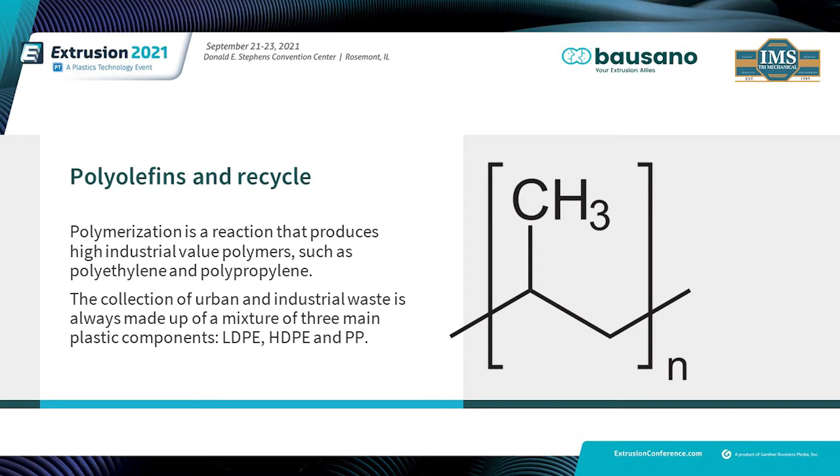PVC is one of the most used thermoplastics with respect to worldwide consumption. At a global level, PVC is consumed at about 35 million tons per year, and is only second to polyethylene as a volume leader in the plastics industry.

Currently, PVC can be processed into a wide variety of short life products. In other words, PVC packaging used in foods, cleansing materials, textiles, bottles, as well as medical devices.

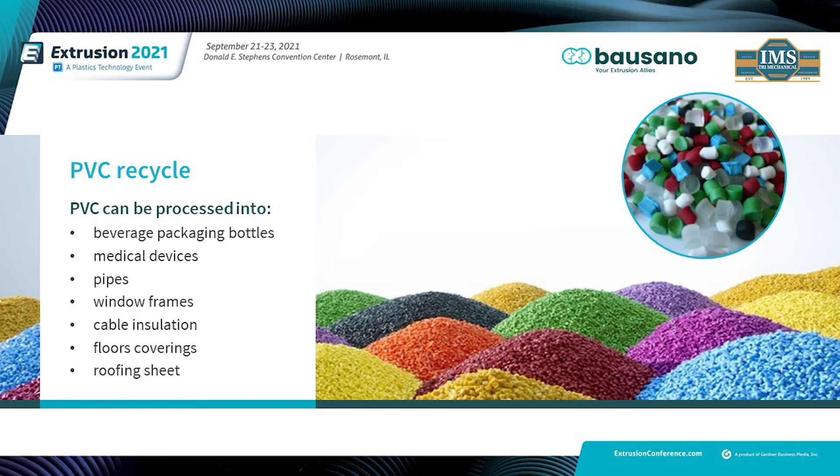Also, PVC can be processed into long life products such as pipe, window frames, cable insulation, floor coverings, and roofing sheet. We know that both pre-consumer and post-consumer scrap can be recovered and transformed into new products.

In mechanical recycling, the materials are ground up, remelted, and reprocessed. The high pressure, high temperature, and stresses undergone during those steps lead to changes in the polymer structure and properties. Polymers such as polyolefins do not have an infinite recycling and reuse capacity.

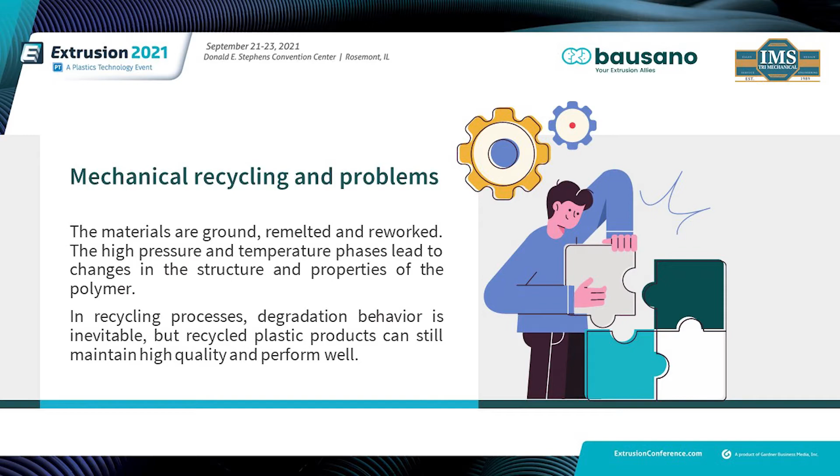This is because when plastics undergo high temperature or shearing during their process stage, thermomechanical degradation occurs. In fact, reprocessing recycled polyolefins is always accompanied with degradation, crystallization, and consequently there are processability issues. This is a result of molecular chain scission, branching, and cross-linking.

The degradation behavior decreases tensile strength and impact strength. In recycling processes, this behavior is inevitable, but the recycled product can still maintain quality and perform adequately. It is important to distinguish between the different types of plastics and their degradation.

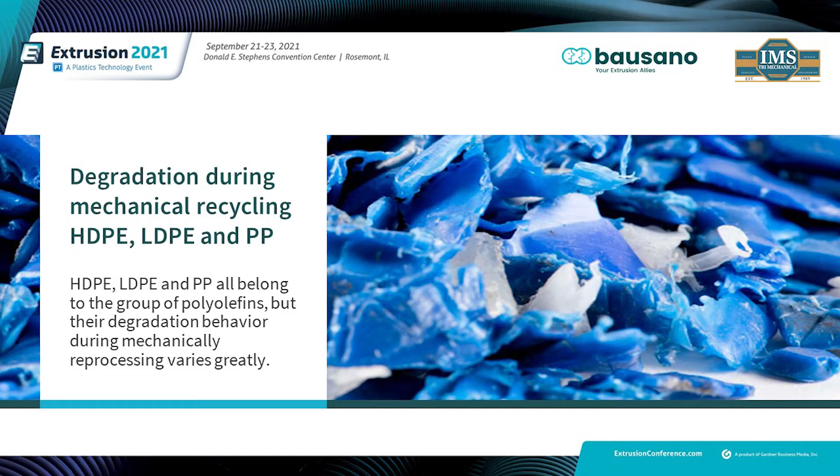For example, HDPE, LDPE, and PP all belong to the group of polyolefins, but their degradation behavior during extrusion varies greatly. For example, in 100 consecutive extrusion cycles through a twin screw extruder using HDPE, a decrease in melt flow index was observed. Also, an increased extrusion torque and complex viscosity occurred within the first 30 cycles.

However, with LDPE, it was observed that for the first 40 cycles, the processability and long-term mechanical properties didn't change. Also, PVC material subject to degradation involves continuous changes in its morphological structures and properties during processing. This is due to shear stress.

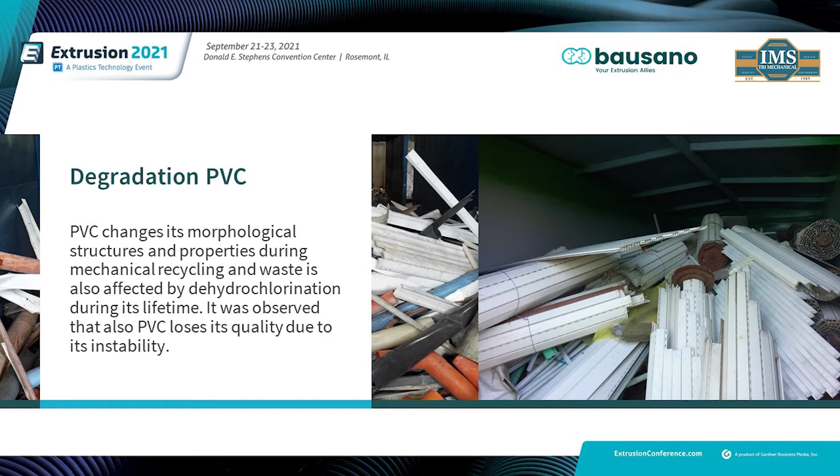The fusion of plastic particles progressively changes the original particle in PVC, just like it does in polyolefins. But in addition, PVC waste is also affected by dehydrochlorination during its lifetime. All of these factors contribute to processing instability.

Specifically, reprocessing HDPE and LDPE makes the material harder to process, as we were talking about earlier in one of the presentations, due to the decreased melt flow index, or MFI, which significantly increases melt pressure, extrusion torque, and complex viscosity.

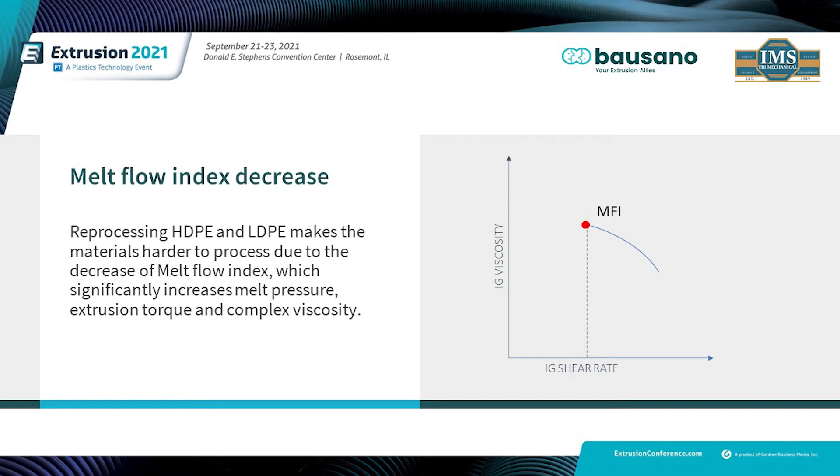Another challenge to PO recycling is that melt viscosity of the material increases considerably, making production processes more energy demanding. The higher complex viscosity makes recycled PE products difficult to extrude. So there are many challenges in recycling polyolefins, including degradation, loss of material properties, or complex viscosity issues.

But like anything else, there are solutions to these challenges. One solution, and the most popular solution, is melt blending. This is one of the most popular ways of mechanically recycling plastic waste.

It refers to blending recycled plastics with similar types of virgin plastics or different types of recycled plastics during the process. Blending recycled plastics with virgin plastics of similar components not only can reduce cost, but the new blended plastics can maintain equal performance with the virgin plastic products.

The melt blending technique is best when doing post-industrial scrap, basically due to the clear separation of the materials, and you also have less contamination present in post-industrial scrap.

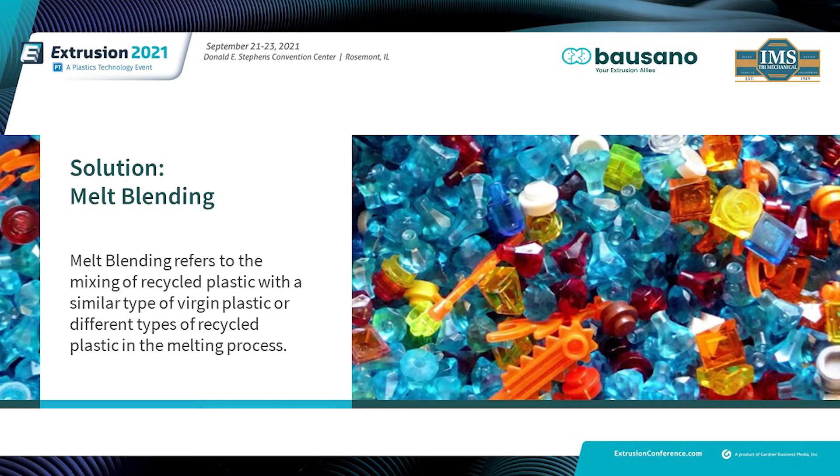Researchers mixed HDPE, LDPE, and PP with their individual virgin materials and tested their tensile strength. The results showed tensile strength of recycled plastics can effectively be improved by melt blending.

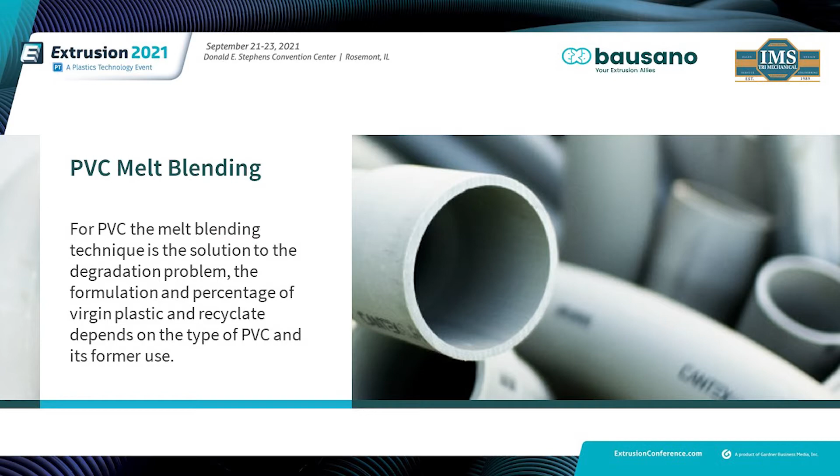Also for PVC, melt blending technique is the solution to the degradation problem. The formulation and percentage of virgin plastic and recycled material depends on the type of PVC though, and its former market use. Unlike PO, which are similar and can be mixed, PVC compounds are different and cannot be mixed.

Several tests were done, however, mixing PMMA and ABS with PVC to improve its quality and mechanical properties. Just like mixing different polyolefins within their family, these tests were also found to be very positive.

With that said, it isn't sufficient just to mix recycled and virgin plastics. PO and PVC scrap needs filler reinforcements as well. These can include natural fibers like wood, hemp, grain, sand - something I'm working on right now - and other inorganic fillers. They can improve morphological, mechanical, and thermal properties.

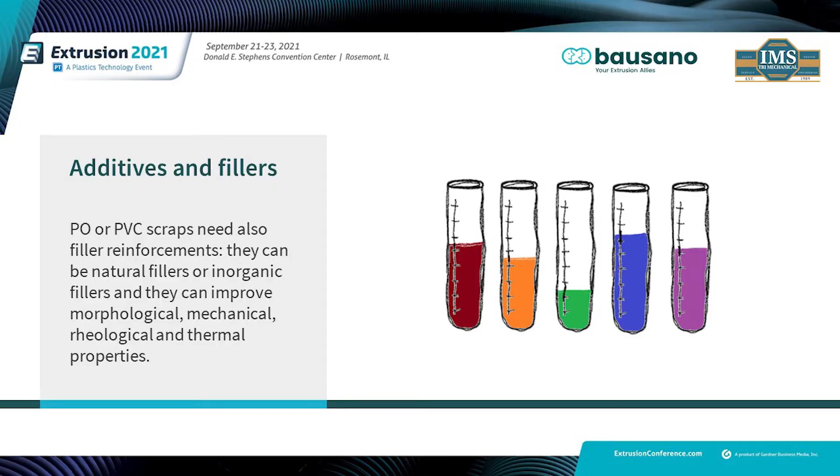Every project needs its own custom extruder and mix of fillers, additives, virgin, and recycled plastics. This is a subject that's starting to reach a little bit now into what's known as WPC, or wood plastic composites. We can talk about that afterwards - it's a whole subject in its own.

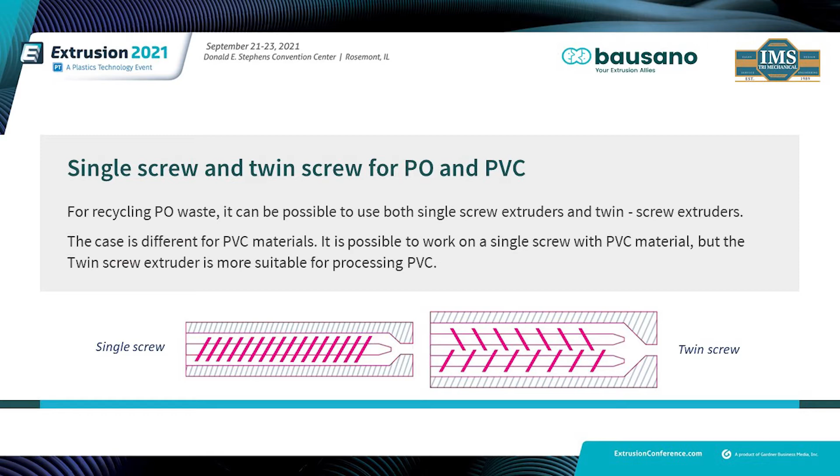For recycling PO waste, it's possible to use a single screw extruder or twin screw extruders. It depends on the original waste and the specific project. When recycling PE in a single screw, the L over D, or length over diameter, will need to be longer than in the normal single screw extruder.

It is possible to process PVC on a single screw, but the twin screw extruder is much more directed towards that direction. One simple example is due to PVC's rougher nature, so the wear and tear will be higher on the screw, which will be much more evident in a single screw extruder - as the screw accelerates in its wear, you'll begin to make inconsistent product.

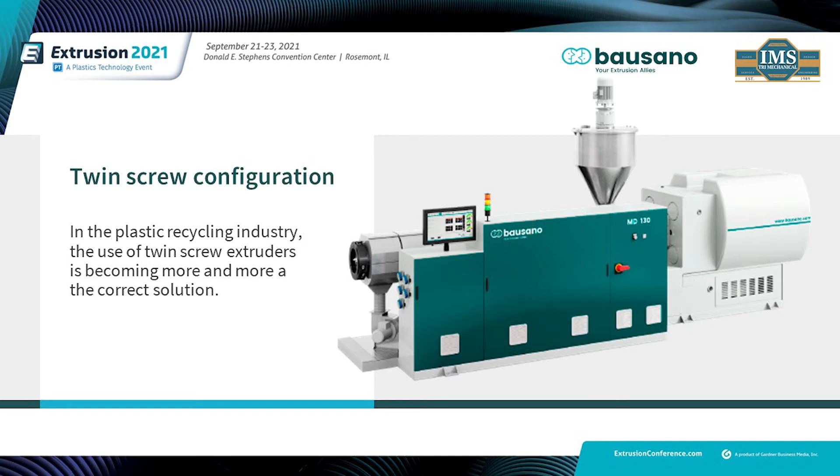In the plastic recycling industry, the use of twin screw extruders is becoming more and more a winning solution to common processing issues and challenges. For this reason today, we are focused more on recycling with a twin screw extruder. A typical twin screw extruder configuration for plastic includes the material feeding system, the melting, and the mixing sections.

Before recycled materials can be processed, the waste plastic must be gathered, cleaned, and then separated according to type. From this, waste is ground up and then can be delivered via conveying lines and feeders to the compounding process.

In any recycling process, the material and waste plastics can be heterogeneous in size, form, and bulk density. Therefore, the correct choice of feeding technology is very important for ensuring the best results. An alternative to gravimetric feeders are volumetric feeders - they're usually cheaper but less precise. So for the recycling process, it's better to use gravimetric or loss-in-weight feeders.

Single screw extruders are operated primarily using flood feeding, which is only suited for feeding bulk materials with consistent densities. When handling secondary raw materials, the bulk material characteristics can lead to irregularities in plastic flow, also known as surging. In contrast, twin screw extruders typically use gravimetric feeders, which are more precise and can react better to fluctuations in bulk density and material flow.

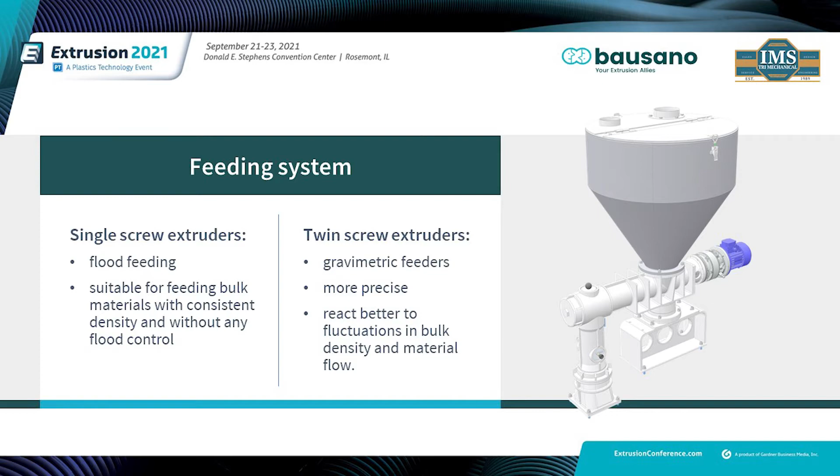There are various feeding technologies, from vibratory to screw feed or weigh belt systems. The right feeder depends on the proper or right application.

In compounding, the screw mixes and melts the polymer via shearing forces. The intense screw mixing, with the possible use of low or high speeds up to 1,000 RPM, makes the twin screw extruder, or TSE, a highly efficient and versatile mixing device.

Screws are segmented and assembled on high torque shafts, and parameters are adjusted according to the process, including additives like calcium carbonate or natural fibers. The mixing can be dispersive, distributive, or a balance of both.

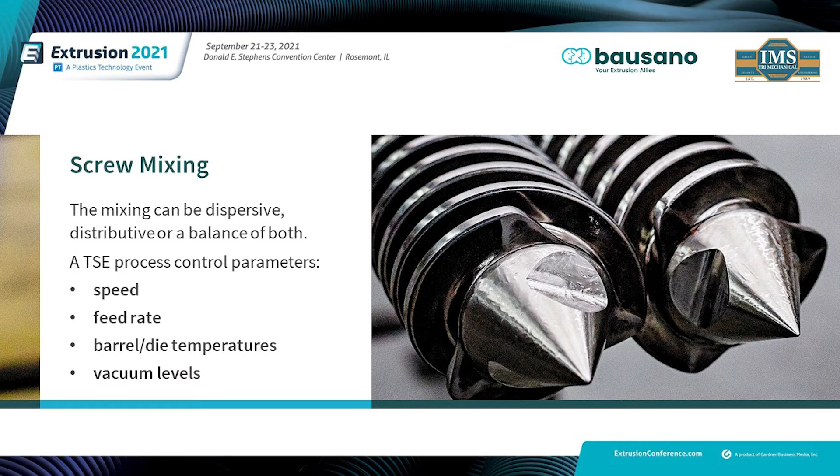The TSE has various process control parameters like speed, feed rate, barrel or die temperatures, and vacuum levels. The TSE can help increase the melt flow index of polymer in a controlled way.

One of the challenges of recycling waste material can be residual moisture, monomers, oligomers, solvents, or decomposed materials. A reprocessing extruder line needs degassing and venting that are carried out during various stages of the extrusion process.

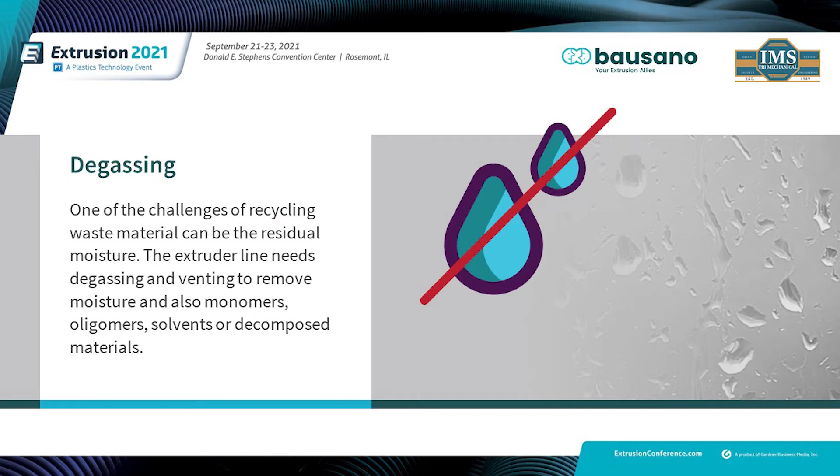In chemistry, an oligomer is a molecule that consists of a few similar or identical repeating units which are derived from copies of its smaller molecule, the monomer — just as a clarification.

After the degassing phase, a vacuum pump pulls more volatiles, followed by a melt or gear pump, and then the material will pass through a screen changer.

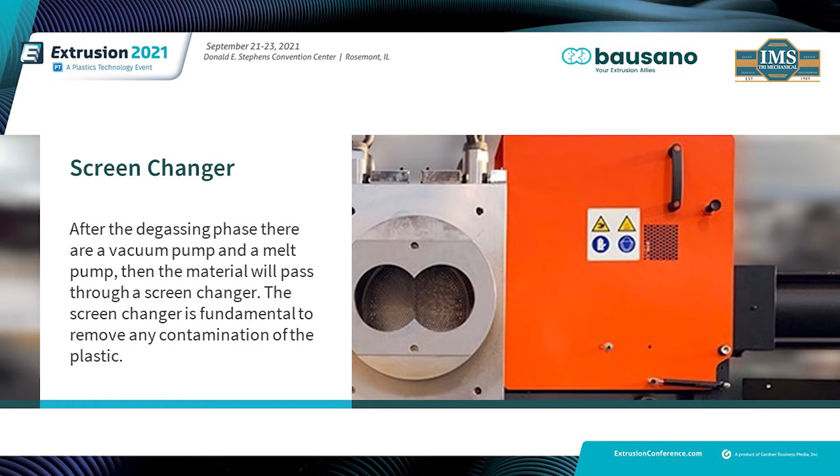In many cases, the screen changer will come before the melt pump, because the screen changer is there to remove any contamination in the plastic that a manufacturer can encounter with waste plastics before the pelletizing phase.

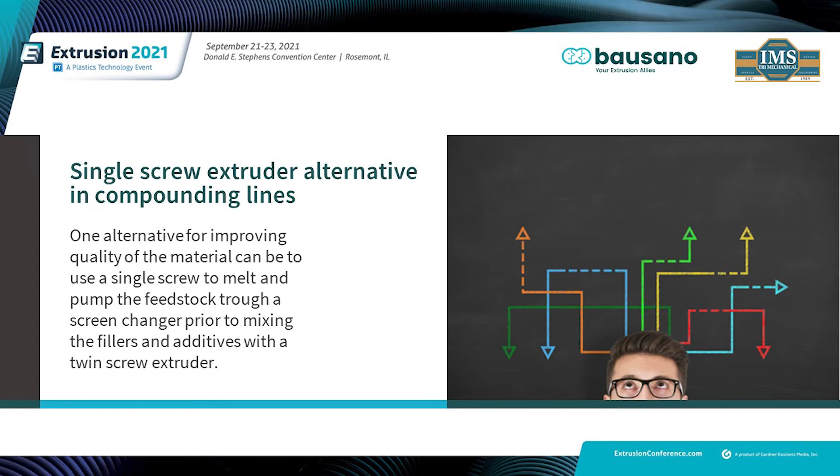Some processes require ultra high quality in the end product. In this case, where low contamination is paramount, some manufacturers use a single screw in conjunction with a twin screw.

A single screw extruder is used to melt and pump the feedstock through a screen changer prior to the fillers and additives with the twin screw extruder. This process allows the twins to mix with less energy used, saving on the need for more stabilizer.

In fact, twins make better pellets. They are typically long and have segmented barrels and screws, and the screws are sectioned to match the barrel, so you can alternate sections of mixing and conveying of the material, venting and adding filler or other components.

Twin screws work better with material displaying poor thermal capacity as well, resulting in advantages while processing polyolefin or PVC that degrade and become more unstable with multiple extrusion cycles.

Twin screws have a lot of advantages when compared to single screw extruders for recycling, beyond mixing capacity, including better process flexibility.

Twin screws can process multiple functions in series, such as melting, mixing, venting, and cooling, all in one extruder. Process parameters like time distribution, lower dispersion of shear rates, or higher convective heat transfer can be better adjusted in twin screws.

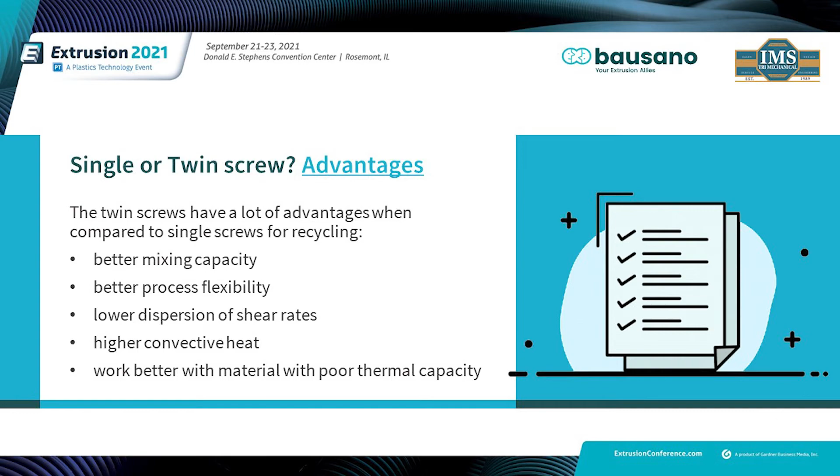Single screw extruders exhibit relatively low dispersion and devolatilization outputs. Depending upon the available raw material, this can lead to inadequate compound quality.

So in the end, the best solution lies in using a twin screw extruder for compounding and recycling, except in the case where you have ultra high contamination, and you've got a conjunction of two technologies.

Recycling processes are highly customizable and based on specific applications. From company to company, no two systems are exactly alike. I think we've all experienced that — you can literally go from line to line, same model, slight differences in the process.

Recycling solutions require an OEM provider who has been proven over time and throughout the world.

Bausano is a worldwide manufacturer who's been designing and producing extrusion lines for the plastics processing industry for over 75 years. Bausano has over 1,000 screw designs and creates new designs every day to meet the growing range of applications internationally.

The plastic processing industry has traditionally been product-oriented, machine-oriented, and lacking in consistent company processes, engineering, and support services.

One of the primary reasons we partnered with Bausano is that they do everything in-house, and that's critically important—it's less and less common in today's environment. From component drawing to line assembly, every step is managed internally by a highly skilled staff that undergoes continuous training.

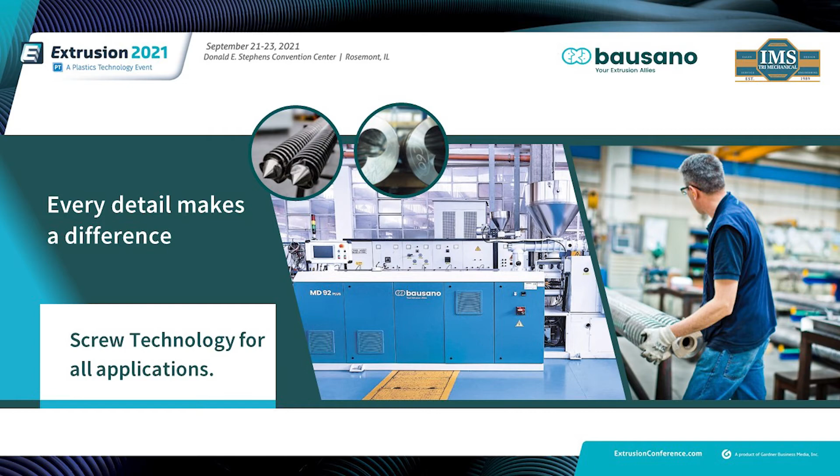Part of that shows up in the screw. The screw is core to the extrusion process. To obtain optimal extrusion, the length of the plasticizing unit must be calibrated to the product being processed. Bausano specialists study every single case in detail to optimize the L/D ratio and allow the extruder to process different materials, even those that are difficult to gel.

They have a range of extruders for compounding, pipe, medical products, tubing, profiles, and something that's becoming more and more the case, which we get a lot involved in, is WPC, or wood plastic composites.

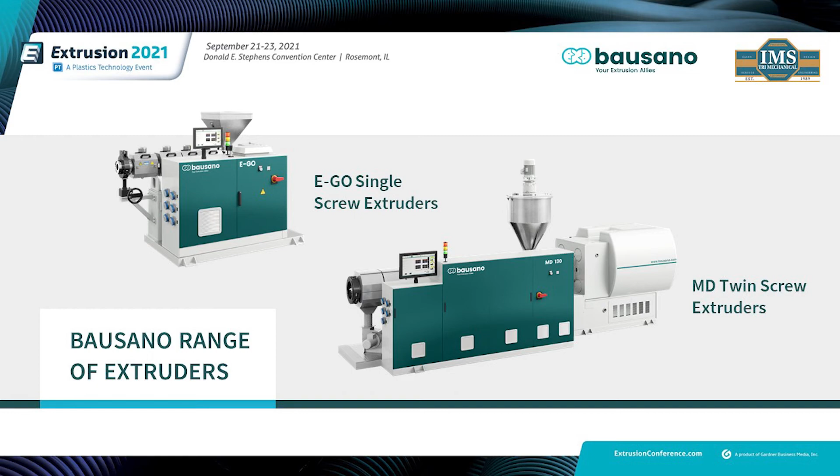Bausano machines are divided not only by product but also by type. Two product lines are the single screw extruders and the twin screw extruders. With the challenges that processing recycled polymers present, the Next Mover series is equipped with several patents.

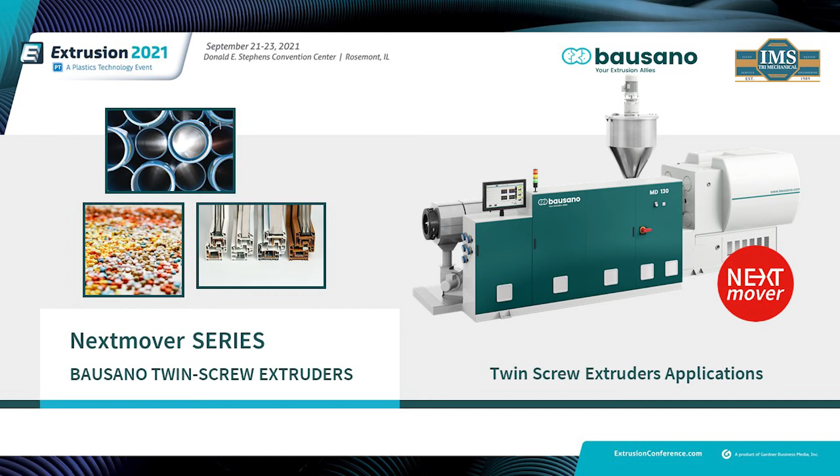This is something I wanted to get into specifically here, which includes the multi-drive system, the smart energy system, and the digital extruder control to manage every parameter of the production process.

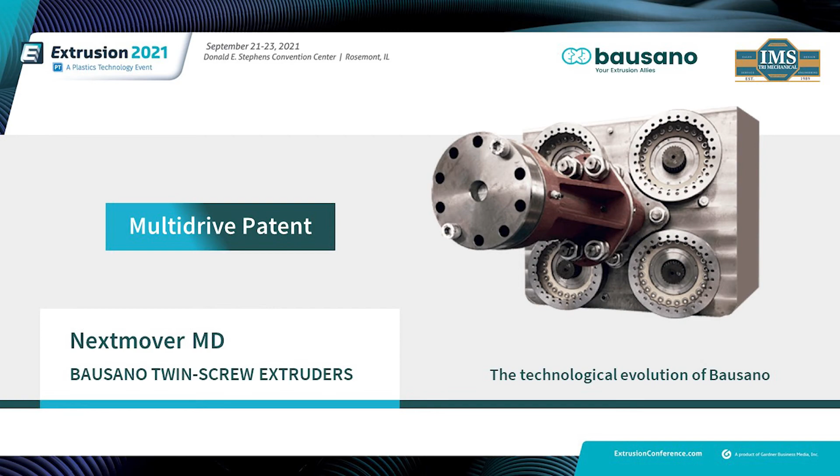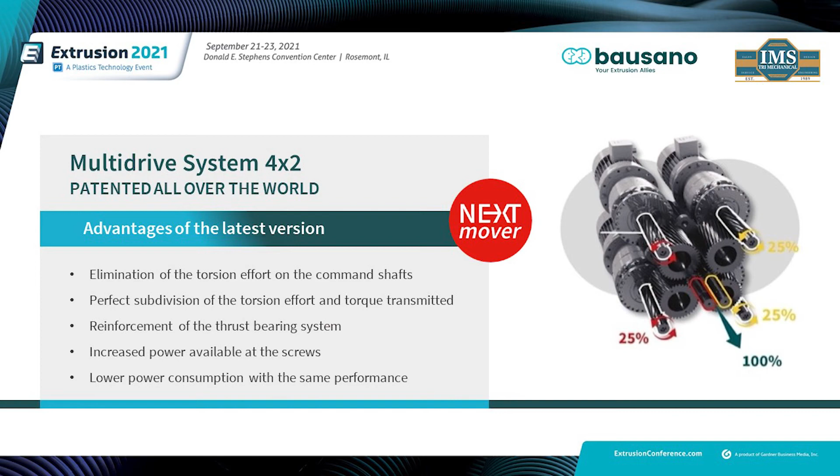The multi-drive system for plastics processing is especially excellent for recycling. We talked about it a little bit earlier, because you start to get into extremely difficult and high torque processes, and the patented multi-drive system addresses those issues. The multi-drive transmission allows for the elimination of torsional stress on the control shafts and splits the stress on transmitted torque. The system of two intermeshing counter-rotating screws guarantees greater durability and optimal performance with any type of extrusion line.

Distribution across four different points increases the life of the shafts and gearbox, and improves power to the extruder with less energy consumed. In other words, with this system you're able to produce more product while consuming less energy.

Then there's the smart energy system—this is something I'm pretty fascinated with as well. The latest innovation from Bausano is the smart energy system, which can be applied on both twin screw and single screw extruders. Bausano was the first to apply the principle of electromagnetic induction at an industrial level on extrusion machinery.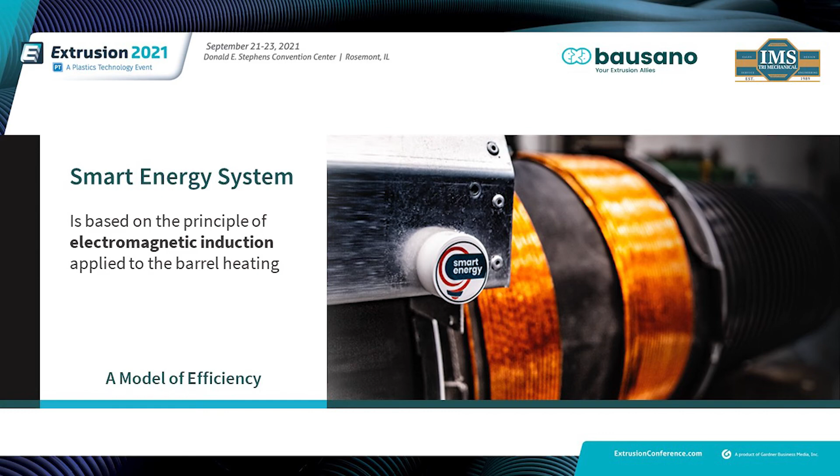With the smart energy system, the barrel is heated without contact by means of an alternating electromagnetic field—a faster and more efficient method which guarantees top performance by significantly reducing component wear, with energy savings of up to 35%. For the recycling industry, offsetting energy costs becomes critically important.

Then there's Industry 4.0. Industry 4.0 goes deep into Bausano's history and is an important option that helps automate highly customizable extruder solutions.

In the area of big data, any device connected to the plastics production process will be able to produce invaluable data on its operation at any time, providing precise, real-time information on the progress of the extrusion process. This data will be collected, stored, and rationalized to improve, correct, and optimize production cycles.

The control system implemented by Bausano consists of data collection platforms that interface with the operator and transmit information to all company applications. This solution allows processes to be simplified, making them more fluid, creating a true factory ecosystem.

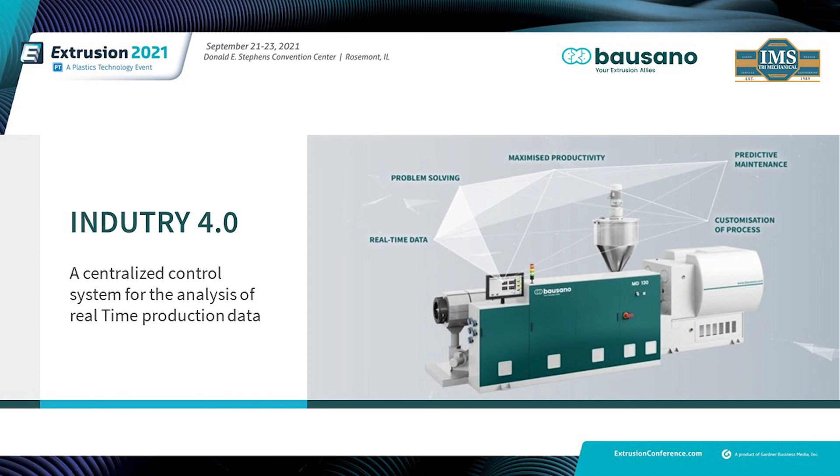Introducing data collection software means transforming your company into a data-driven factory—a company that is data-driven and able to make decisions based on objective facts, not personal feelings. Digital technology is essential, but it is a strategic step and can bring a culture of data to all levels within the company. And with that, I thank you for your time.

Any other questions? And I like that kind of question. Let's keep asking that kind of question.